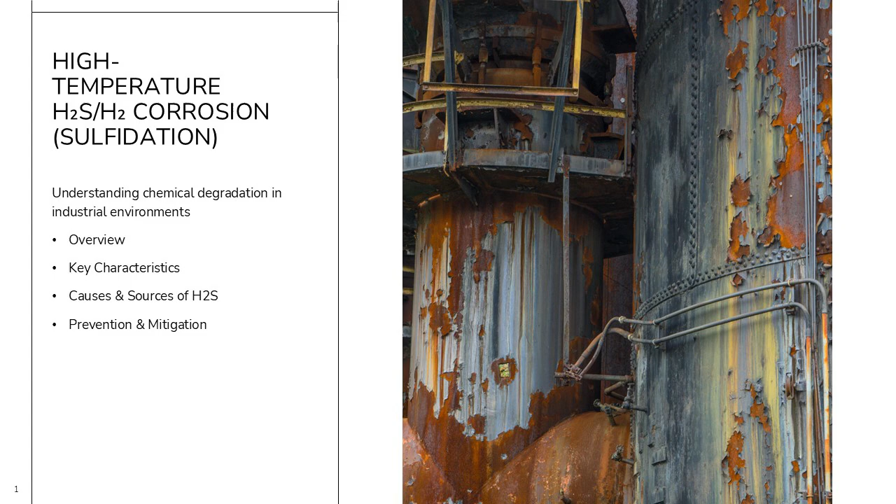High-temperature H₂S/H₂ corrosion, commonly referred to as sulfidation, is a severe form of metal degradation that occurs in refining and petrochemical environments. This phenomenon typically begins at temperatures above 400 degrees Fahrenheit or 204 degrees Celsius and is most prevalent in hydroprocessing units such as hydrotreaters and hydrocrackers.

The process involves sulfur compounds reacting with hydrogen to form hydrogen sulfide, H₂S, which aggressively attacks steel surfaces. The corrosion mechanism leads to the formation of iron sulfide scales that are brittle and prone to spalling, exposing fresh metal to further attack. This cycle accelerates metal loss and significantly reduces equipment life.

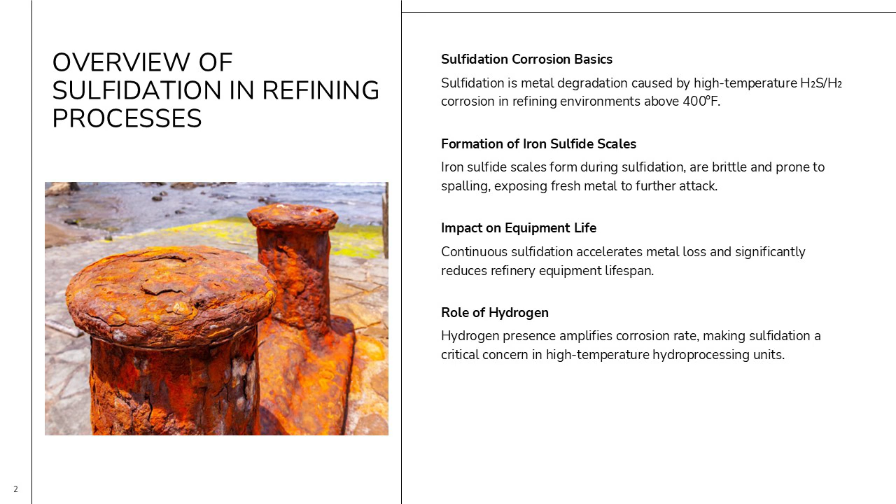The presence of hydrogen amplifies the corrosion rate, making it a critical concern for high-temperature operations. Understanding this corrosion type is essential for ensuring the integrity of refinery equipment and preventing catastrophic failures.

The environment where high-temperature H₂S/H₂ corrosion occurs is typically hydrocarbon streams in refining and petrochemical units, including hydrodesulfurization and hydrocracking processes. These streams contain hydrogen sulfide and hydrogen, creating a highly reactive environment. The corrosion process starts above 400 degrees Fahrenheit (204 degrees Celsius) and becomes more aggressive as temperatures increase.

Mechanistically, sulfur reacts with metal surfaces to form iron sulfides such as FeS and Fe3S4. These sulfide scales initially provide some protection but are brittle and tend to flake off under thermal and mechanical stresses, exposing fresh metal to further attack. Hydrogen accelerates this process by enhancing the chemical reactions and destabilizing protective layers.

The damage caused is primarily uniform thinning of metal surfaces, which can lead to equipment rupture if not managed properly. Carbon steels and low-alloy steels are highly susceptible, while stainless steels with higher chromium content, 9 to 12% Cr, offer better resistance.

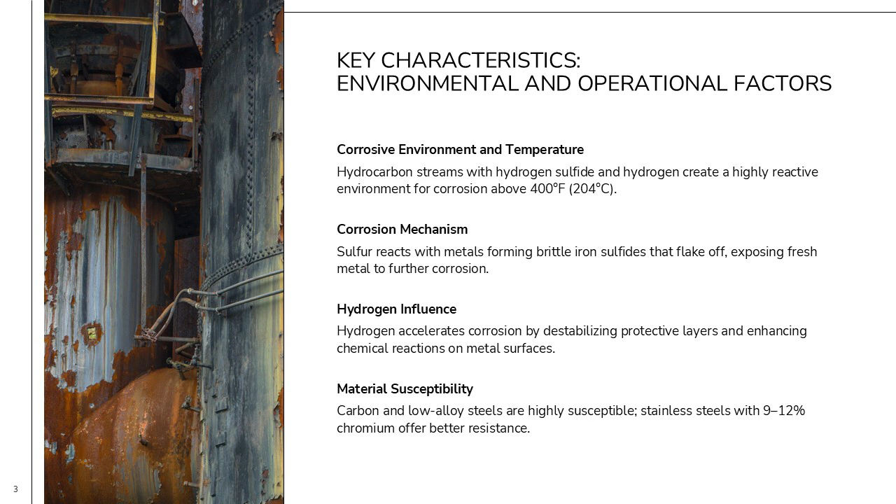The mechanism of high-temperature H₂S/H₂ corrosion involves a series of chemical reactions between sulfur compounds and metal surfaces. Initially, sulfur reacts with iron to form iron sulfide scales, such as FeS and Fe3S4. These scales act as a temporary barrier, slowing down further corrosion. However, the presence of hydrogen significantly accelerates the breakdown of these scales.

Hydrogen promotes the catalytic decomposition of sulfur compounds, increasing the formation of H₂S and destabilizing the sulfide layer. As the scales become brittle, they spall off due to thermal cycling and mechanical stresses, exposing fresh metal to corrosive agents. This continuous cycle of scale formation and spalling leads to rapid and uniform metal loss. The process is particularly aggressive in high-temperature zones and areas with turbulent flow, making it a major concern for hydroprocessing units.

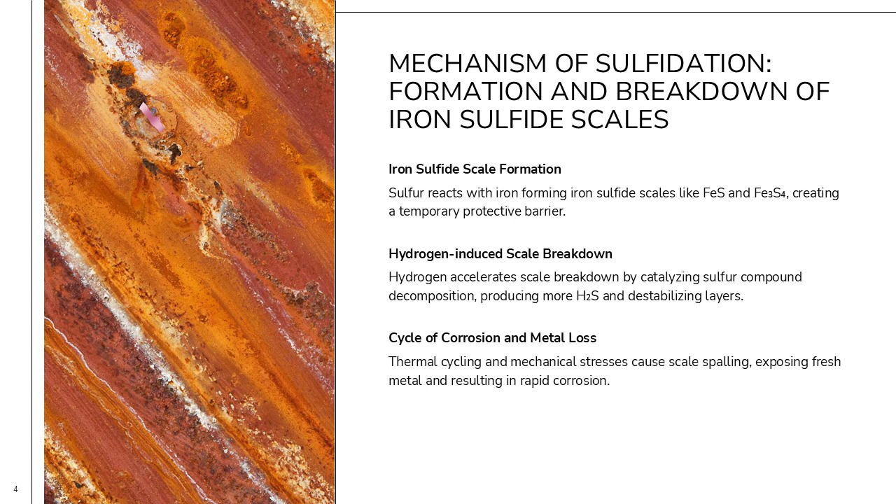Hydrogen sulfide, or H₂S, in refining environments originates from multiple sources. Sulfur compounds present in crude oil, such as thiophenes and mercaptans, are converted to H₂S during hydroprocessing operations like hydrodesulfurization and hydrocracking. Additionally, microbial activity, particularly from sulfate-reducing bacteria, can produce H₂S in cooler sections of the process.

At high temperatures, the decomposition of sulfur-containing compounds further contributes to H₂S formation. These sources collectively create a corrosive environment that, when combined with hydrogen, accelerates sulfidation. Understanding these origins is critical for implementing effective mitigation strategies, such as controlling sulfur levels in feedstock and optimizing process conditions to minimize H₂S generation.

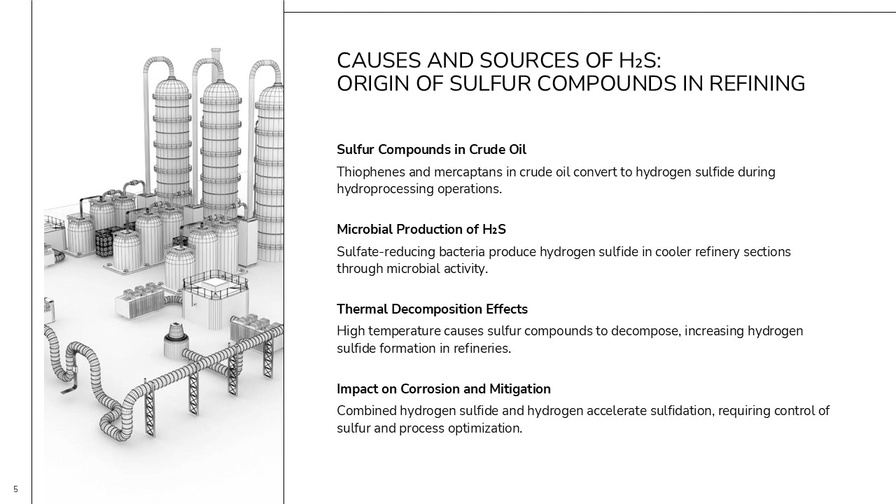High-temperature H₂S/H₂ corrosion primarily causes uniform metal thinning, which can compromise the structural integrity of critical equipment. This type of damage is particularly dangerous because it may not produce visible signs until significant metal loss has occurred, increasing the risk of sudden equipment rupture.

Carbon steels and low-alloy steels are highly vulnerable to sulfidation, while stainless steels with higher chromium content, such as 304H and 310, and CrMo alloys like P91, exhibit better resistance. Chromium enhances the formation of stable sulfide scales that are less prone to spalling, providing improved protection against corrosion. Selecting appropriate materials for high-temperature environments is essential to prevent catastrophic failures and ensure long-term reliability of refinery operations.

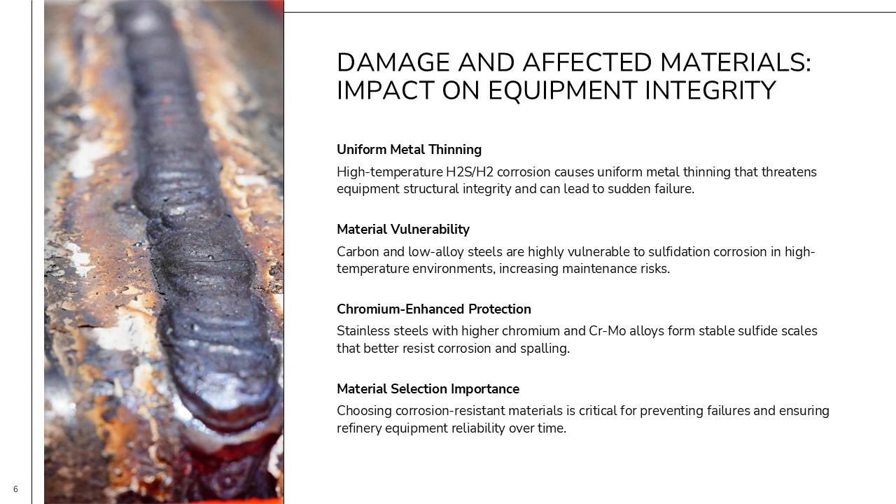Preventing high-temperature H₂S/H₂ corrosion requires a combination of material selection, process control, and monitoring. Using high chromium and chromium-molybdenum alloys, such as 304H, 310, and P91, provides enhanced resistance to sulfidation. These materials form more stable sulfide scales that resist spalling, reducing metal loss.

Process control measures include managing operating temperatures, controlling sulfur and H₂S levels, and optimizing hydrogen partial pressure to minimize corrosion rates. Regular monitoring through techniques like ultrasonic testing is essential for detecting early signs of metal thinning and preventing unexpected failures. Advanced software tools, such as S-Compass, can assist in predicting corrosion behavior and selecting suitable materials for specific operating conditions. Implementing these strategies ensures the safe and efficient operation of hydroprocessing units.

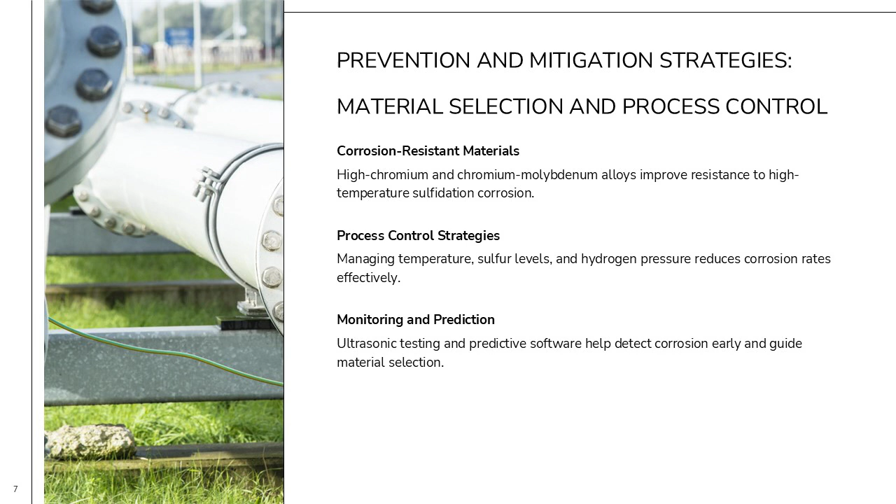High-temperature H₂S/H₂ corrosion is a critical issue in refining and petrochemical industries, particularly in hydroprocessing units operating above 400 degrees Fahrenheit (204 degrees Celsius). The combined presence of sulfur compounds and hydrogen creates an environment that accelerates sulfidation, leading to uniform metal loss and potential equipment failure. Effective mitigation requires selecting corrosion-resistant materials, such as high chromium alloys, and implementing robust process control measures to manage temperature and sulfur levels.

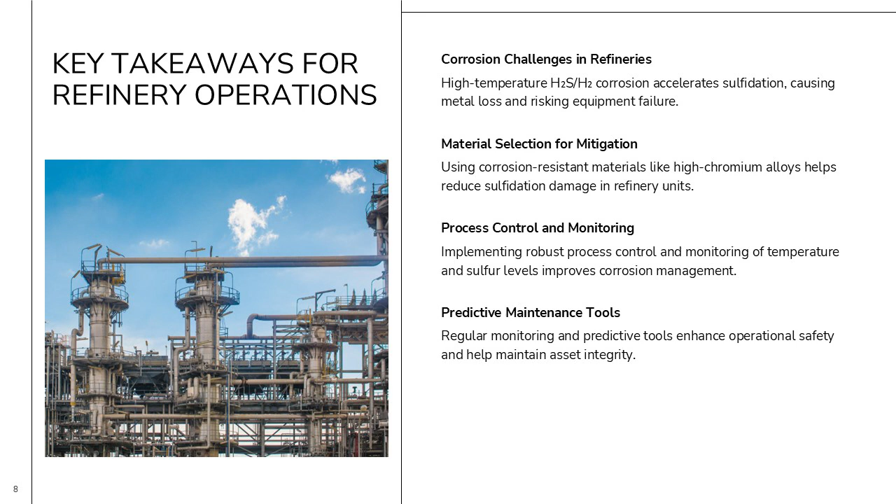Regular monitoring and predictive tools further enhance corrosion management, ensuring operational safety and reliability. By understanding the mechanisms, sources, and preventive strategies, refineries can minimize the risks associated with sulfidation and maintain the integrity of their assets.